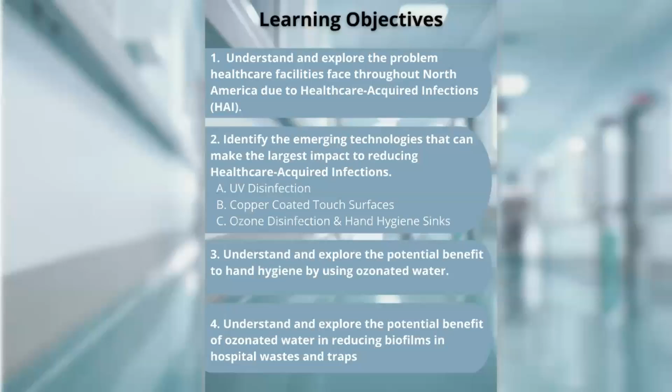And by the end of this presentation, you'll have a deeper understanding of the benefits of ozonated water related to hand hygiene. And lastly, we'll discuss how ozonated water technologies benefit hospital cleanliness and improve patient outcomes. So first, we'll cover the basics. What is a healthcare acquired infection? We call them HAIs. HAI is short for healthcare acquired infection or hospital acquired infection. We'll use those interchangeably. An HAI, put simply, is an infection that you get from a hospital.

There's 4 criteria to labeling an HAI, and it can meet one or all of these criteria. 1, it's acquired up to 48 hours after admission to a hospital. It's acquired 3 days after discharge from a hospital. It's acquired up to 30 days after an operation, and or it's acquired in a hospital when admitted for something other than the issue or problem that you went in with.

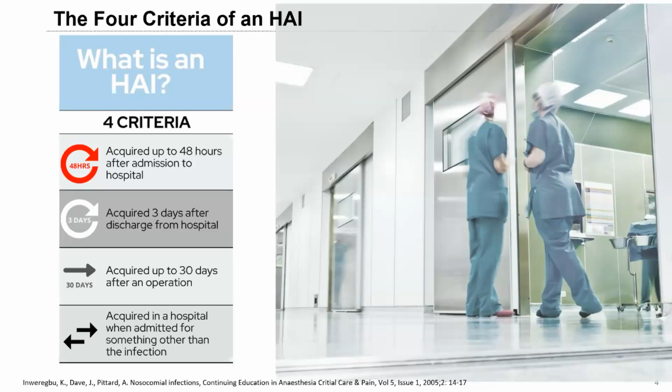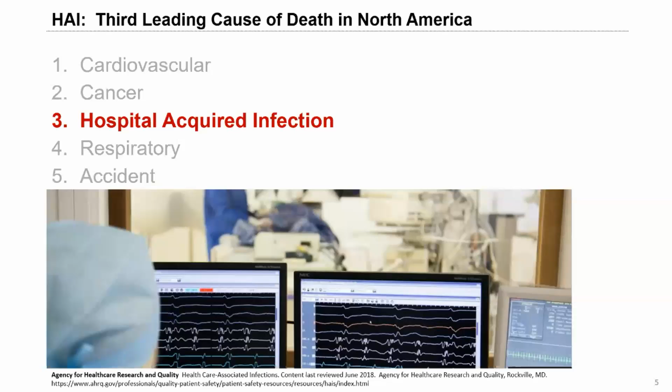So as I go through this, I'm going to be talking about stats and information that was found and researched before the pandemic. So all of these facts and figures are pre-COVID. Even though COVID has likely impacted these figures, the team felt that it was important to not just kind of take a guess. COVID has impacted these numbers, but we felt that this information was good to present on its own. HAIs are among the leading causes of death in North America. When we look at Canada and US per capita, HAIs are estimated to be the third leading cause of death.

And these stats are pretty alarming. Every 45 seconds, a hospital patient is infected with an HAI, and every 8 minutes, a patient dies from an HAI. So on any given day, 1 in 31 hospital patients have at least one healthcare acquired infection, and 1 in 10 of hospital infected patients will actually die from their HAI. There's a huge economic impact as well.

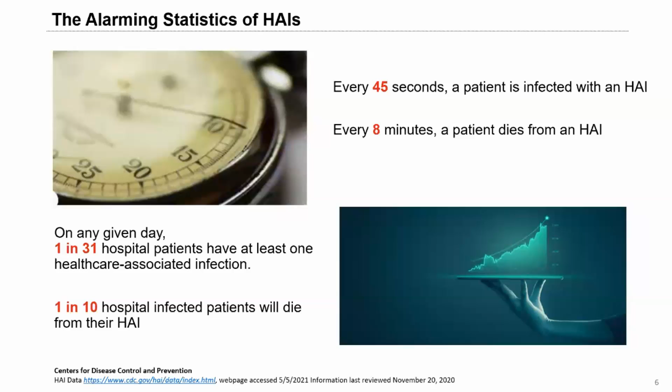HAIs are expensive. The estimated average direct cost for HAI treatment is about $30,000 per case. And according to a University Health Network study, C. difficile cases cost over $38,000 to treat. The direct treatment cost for hospital-acquired infections is estimated at around $45 billion annually. And that's pre-COVID information, like I said. I'm sure COVID's made it worse.

The total cost to the healthcare systems, to families, to the economy, and to individuals is even higher. HAIs have a domino effect on the whole healthcare system. Infected patients stay in hospitals much longer before being discharged, and approximately 10% of acute care beds in urban hospitals are occupied by patients who have had an increased length of stay due to their HAI.

And so when patients are in the hospital longer, they take up valuable bed spaces. Patients end up being treated in hallways and lounges or squeezed into rooms designed for fewer patients. We've seen the overcrowding. ER wait times are also increased because the ER is stacked with patients waiting for a bed to free up.

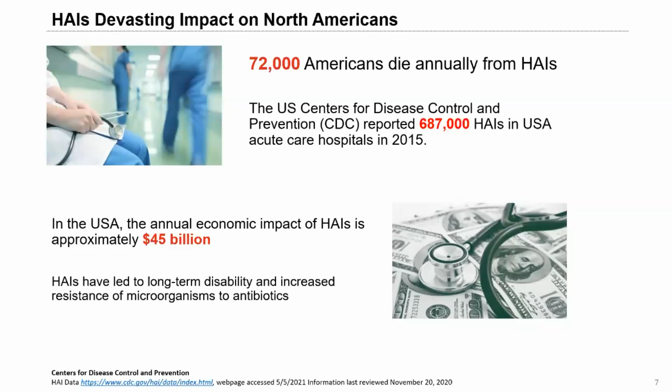So the 3 most common forms of HAIs are C. diff, MRSA, and CAUTI. Clostridium difficile is one of the most frequent infections to occur in hospitals. C. diff exists in a vegetative state inside the human body, and when it's outside the body, it can exist as a spore, which can become airborne and spread to surfaces. Alcohol-based sanitizers cannot kill C. diff spores.

MRSA is a form of staph infection that is resistant to many of the common antibiotics used to treat staph infections. So due to their resistance, they can easily spread throughout the hospital, causing alarming outbreaks. And catheter-associated urinary tract infections can occur when patients are catheterized for a longer period of time, or if there's improper maintenance or procedures used to change or put in or remove their catheters.

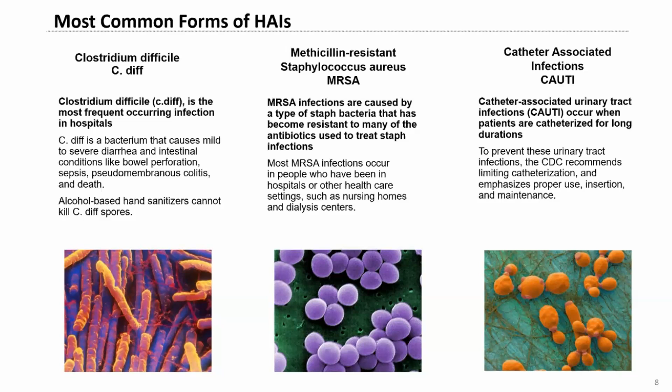So containing the spread of HAIs is really important. Next, we'll look at techniques that hospitals and healthcare facilities use to help prevent the spread. This presentation was initially created before the COVID-19 pandemic hit. Hospitals have likely improved their room cleaning protocols since the start of the pandemic. So when it comes to cleaning, patient rooms are first decluttered and then cleaned and disinfected to be set up for the next patient. The process is traditionally done with cloths and harsh chemicals at the very minimum.

So a manual daily cleaning takes about 15 minutes to do. Surfaces are spot cleaned since patients are still usually occupying that room. A room turnover or terminal clean is performed after a patient has left the hospital prior to a new patient coming in. A room turnover clean takes about 30 minutes. And an isolation clean is the deep cleaning performed after a patient who's been in isolation or who's had an infection has left that room. That's an even longer process. It takes up to about 45 minutes.

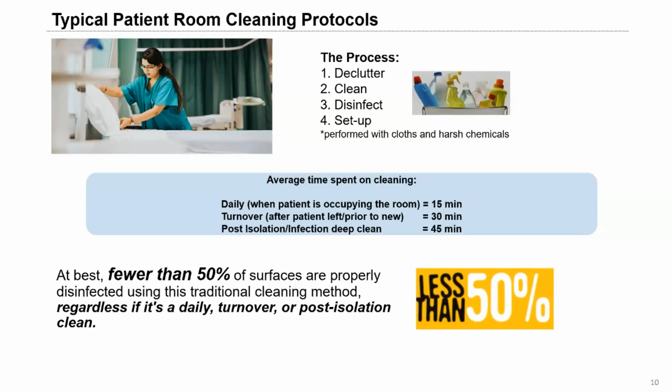At best, fewer than 50% of the surfaces are properly disinfected using this traditional cleaning method, no matter if it's a daily, a turnover, or a post-isolation clean. Proper cleaning practices are important to help control the spread of infection in hospitals. And next, we'll be exploring the technologies that can help prevent healthcare-acquired infections that go above and beyond just that straight chemical and cloth cleaning. These are emerging technologies, not because they're new, but because their use in the healthcare setting is becoming more and more prevalent.

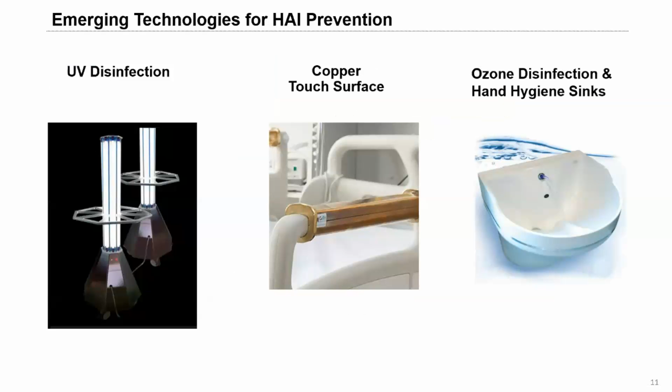So, oh, that's a blurry photo.

So fast forward to modern times, studies have shown that UV disinfection has a dramatic impact in reducing healthcare-acquired infections. UV light will disinfect all surfaces, and it's extremely effective when used in conjunction with traditional cleaning. Rooms disinfected with UV have shown reductions of HAIs by over half.

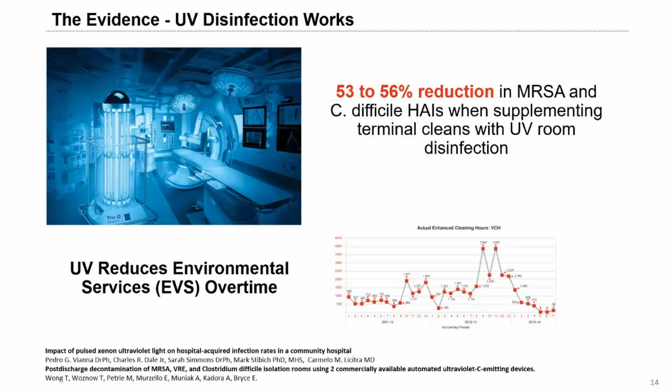So they brought in the UVC machine, and after UV disinfection, 0 out of 21 rooms tested positive for C. diff. So we show that UVC disinfection is an effective neutralizer of that persistent bacteria.

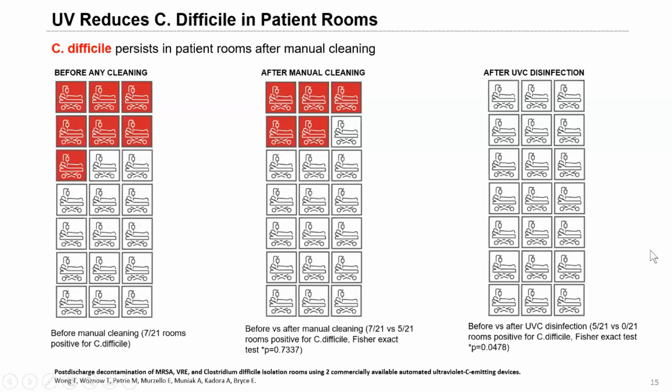So next we'll review how copper can be used in healthcare applications. Like UV disinfection, copper has been known to be antimicrobial for a super long time. The Egyptians were the first to mention the antimicrobial effects of copper in about 2600 BC. They used copper vessels to sanitize drinking water. They used copper implements to treat chest wounds. Copper is registered with the EPA as a pesticide and can reduce colony-forming units by 99.9% in less than 2 hours.

Here's a couple of real-world examples to show the reduction of surface pathogens that occurred when hospitals changed some high-contact, high-touch surfaces to copper. So on the left, the Memorial Sloan Kettering Cancer Center in New York changed the bed rails, the food service tray, and the IV stands to copper-coated surfaces. And by doing so, it reduced the pathogens on those surfaces by 97%. So notice the high traffic touch surfaces are copper in the room on the right. HAIs were reduced by 58% in this VA medical center in South Carolina.

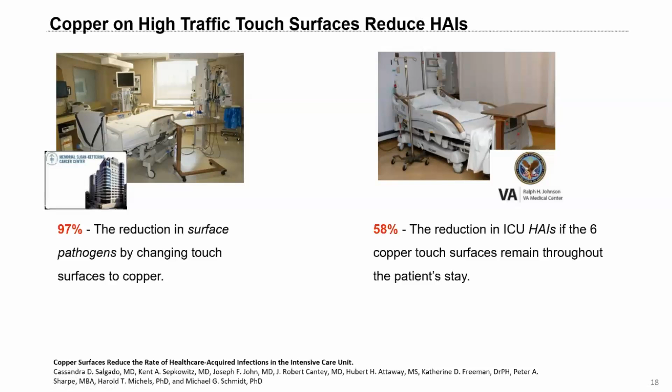I thought I'd throw in a real life non-healthcare example of a very high traffic area. This is Grand Central Station. Last time I checked, we had 750,000 people pass through Grand Central Station every single day. Grand Central opened in 1913, so some of the fixtures in that building can be over 100 years old.

On the right here, we show some high touch surfaces like this pull handle and this railing are made of copper. So swabs were taken on a few touch surfaces, and you can clearly see the difference in CFU counts between copper and other non-copper surfaces. So the wood right beside the handle has so many more colony forming units per 100 square centimeters. Same thing with the wood on this railing versus the copper railing beside. The difference is huge.

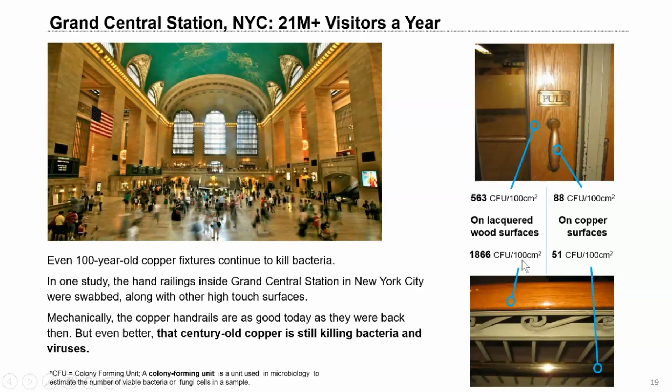So here are some examples of copper touch products available on the market today for healthcare. We're starting to see various antimicrobial copper medical equipment being put into practice. So from stethoscopes to doorknobs and food trays, this is a great use of this material for high touch surfaces. Copper is a great application for dry touch surfaces, but keep in mind they still need to be cleaned.

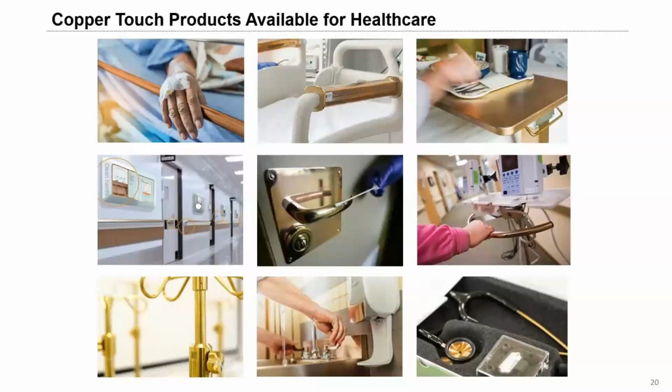The thing is it's great for plumbing as well. However, the bacteria needs to be wiped away, and there's no real mechanical way to wipe away inside of plumbing. If you leave bacteria in plumbing, it creates a layer over time called the biofilm that acts as a barrier against further effectiveness. So it's almost like a little crust that builds.

So moving on from UV and copper disinfection, let's review ozone technology for infection prevention. You might see a reoccurring theme here. These technologies aren't new. Ozone has been used for water treatment for centuries. So ozone is a powerful and unique disinfectant. We're talking about applications for water in this presentation. Ozone is germicidal and rapidly destroys any waterborne viruses and bacteria with nearly unmatched speed.

So like chlorine, ozone oxidizes the bacteria and protozoa upon contact. The ozone penetrates the cell wall of the microorganism and ruptures them on a structural level, and the microorganisms can't reproduce. So unlike UV disinfection, there is no reduced flow rate or extended contact time required for disinfection. Ozone works in a matter of minutes. Ozonated water is non-toxic to humans at the levels required for disinfection. And the ozone produced in the water stream reverts back to O2, simple oxygen, within about 20 minutes.

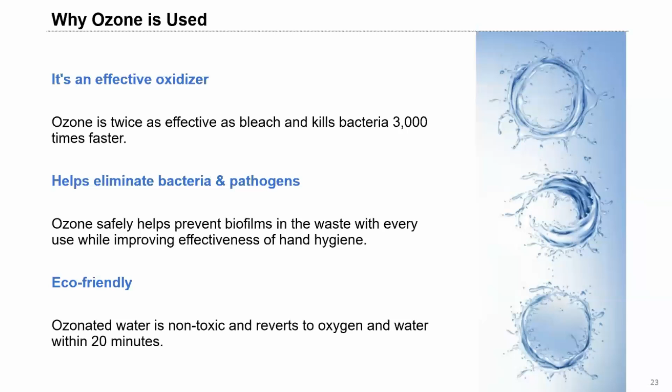So ozonated water has been shown to be effective against many forms of bacteria, such as Legionella, E. coli, C. diff, and more.

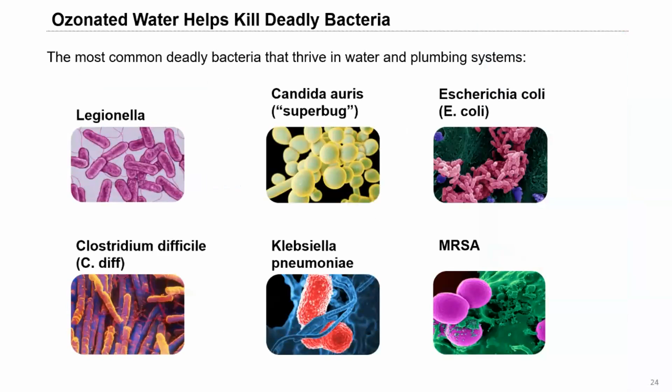So these are the most common bacteria that thrive in plumbing systems. So just so you know, we're not talking out of school. We've got the data to prove the effectiveness. Time kill studies performed by third-party labs show that electrochemical water disinfection using ozone and different oxidizers can be effective at reducing waterborne pathogens with super low contact times too, within seconds or minutes.

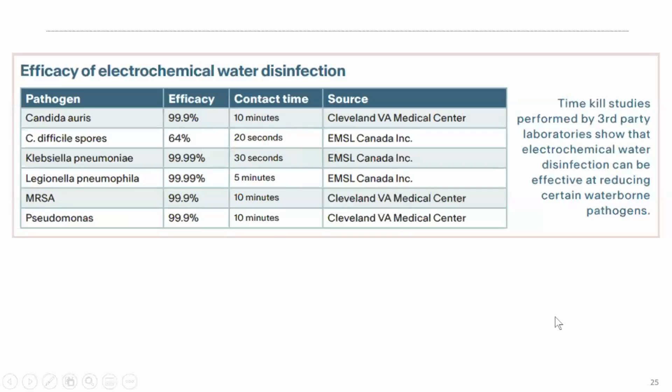All right, we're getting into the good stuff here. Ozone is also effective against mold and mildew forming organisms.

Again, if you're having lunch, I'm sorry. These next few slides aren't going to get any better.

So here's an in-field example of the problems caused by mold and mildew growth in a wet environment. This is the inside of a hospital ice machine. This photo was taken 3 months after a deep clean. So you can see the buildup of mold, mildew, and yeast. This is where your ice is getting made.

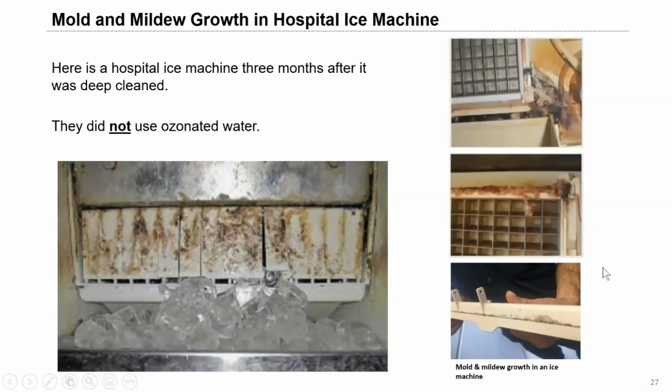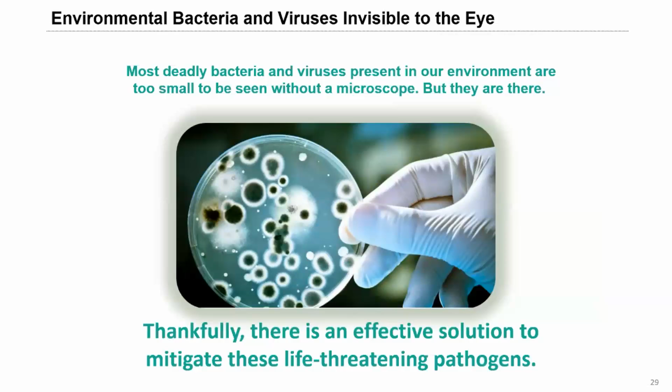So there are bacteria and viruses that are present in our environment. They're in our ice machines, they're in our plumbing, and in any number of bodies of water. And they don't tend to cause a lot of issues out in the wild. But the problem happens when people who are sick or immunocompromised are exposed to these pathogens. It becomes a problem. And we have a solution to help mitigate waterborne pathogens, and that's by using ozonated water for hand hygiene.

So it is now possible to wash your hands with water that has disinfecting properties. Infusing water with dissolved oxidants, including ozone, can help reduce the number of bacteria that's present on hands, making hand washing a lot more effective. Those same disinfecting properties will also help eliminate the sink as a source of bacterial outbreaks, which has happened, but we'll talk about that later.

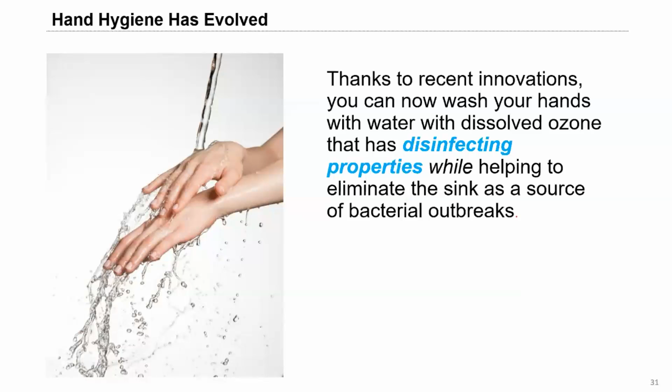So healthcare staff are well trained in the method and importance and technique of proper hand washing. But it's usually not healthcare staff that's the problem. Often it's the unclean hands of the patients themselves that cause the transmission of HAIs. A study conducted in patients of hospitals using RFID tags show that they'll wash their hands only about 70% of the time. So that's like before and after eating, before and after using the bathroom.

I'm really sorry if you're eating.

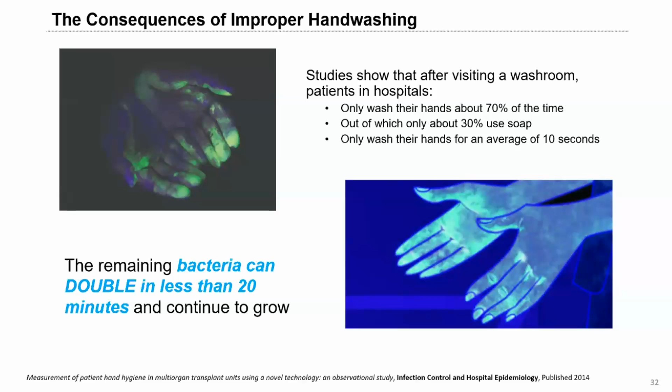Of those that were shown to wash their hands, only about 30% of them use soap and are only lathering for, on average, about 10 seconds. And if the pandemic taught us anything, it's you need to lather for 30 seconds. So when you have bacteria that's left on your hand, that bacteria will continue to grow and double in less than 20 minutes.

So a university study performed hand wash studies on untrained participants, just meaning regular people, not healthcare people. So for the large percentage of people that only use water to wash their hands, the improvement in hand washing is evident. So we had 4 groups of people that washed just with tap water, with soap and tap water, soap and ozonated water, and ozonated water only. So using soap and water showed a removal of just over 61% of the bacteria. By using the same methods with ozonated water, over 80% of the bacteria was removed.

Now, you look at this chart and we're not recommending to not use soap. It's just that this study shows that behaviorally, if a patient is using ozonated water and chooses not to use soap, the benefits will still be there.

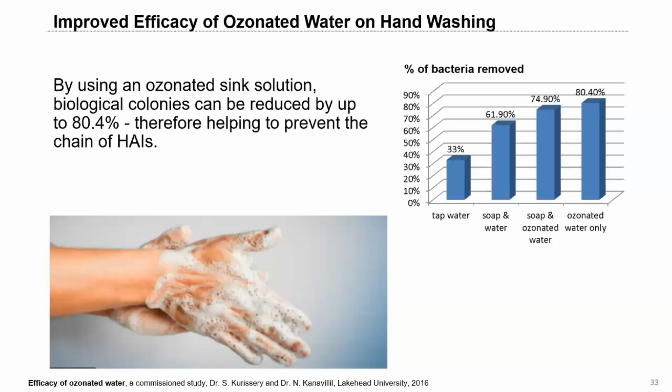Sorry, so we talked about biofilm. Okay. Just a quick question before we move on to some of these next parts. We had a couple of questions coming in, kind of comparing the hand washing for ozonated water versus the cleaning that you mentioned. Are they different systems for generation? No, it's the same system. But would you have a central ozonated water generation, or would you have more point of use for each piece of equipment? Yeah, so each sink has an ozone generator built in.

It's shipped with the product, and it generates ozone on demand, because ozone reverts back to its oxygen state. So the ozone molecules that are in there are not super duper concentrated. They're concentrated enough to make a difference on the spot, but you can't have a tank of it going out to the entire floor or through the whole hospital. So it's just sort of a small contained unit.

And then for the ice machine cleaning that you had talked about, would that be a separate sink system, like an ozonated generation in the maintenance area, or how? Yeah, so it's actually a small inline unit for that ice machine. So that's actually a really small unit for the ice machine that generates ozone just to be able to run that line to the ice machine.

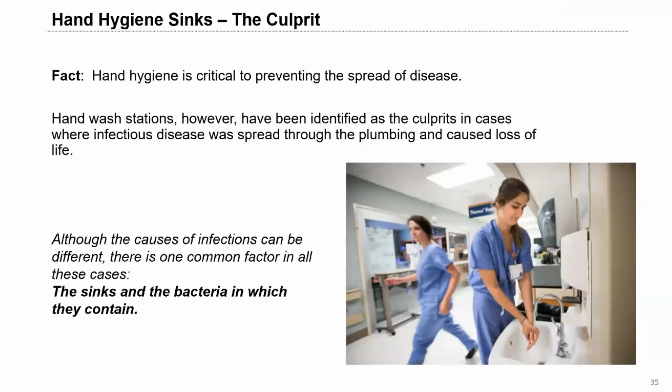It's been known for hundreds of years how important hand hygiene is to prevent the spread of bacteria and disease. Thank you, Florence Nightingale. Look her up. Hospitals are designed with hand hygiene sinks placed throughout the hospital to help control outbreaks. Unfortunately, in some cases, some hand hygiene sinks have actually contributed to the HAI problem. So poorly designed hand hygiene sinks have been shown to harbor and spread bacteria.

So between 2004 and March 2006, a prominent hospital in Toronto experienced a deadly contagious Pseudomonas outbreak that led to the death of 17 patients, and 36 other patients developed serious illness while under the hospital's care. Another prominent hospital experienced 66 patients infected or colonized by a very pesky drug-resistant bacteria called Klebsiella oxytoca from the fall of 2006 to the spring of 2011.

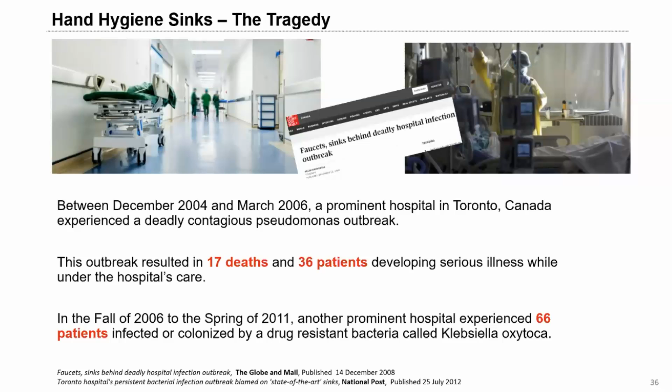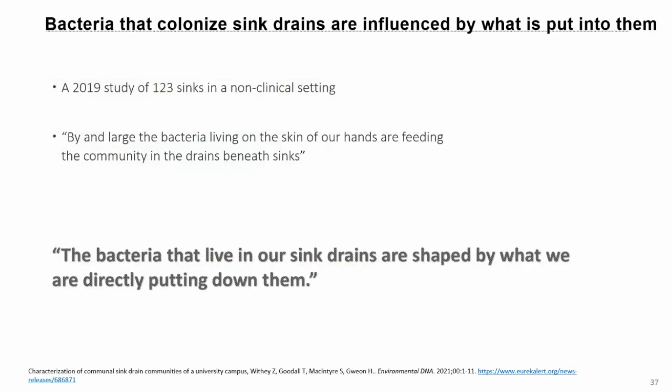So these were highly publicized instances where an outbreak was traced back specifically to a sink. The problem was twofold. It was the design of the sink as well as the bacteria inside of the sink that was making people sick. So the bacteria that lives in a sink drain is shaped by what we're putting down them. That's a quote from Zoe Withey, a researcher at the University of Reading. She published a study of sink drains on a university campus, but the principle applies even more so to hospital drains because they put everything down that drain, sometimes when they shouldn't.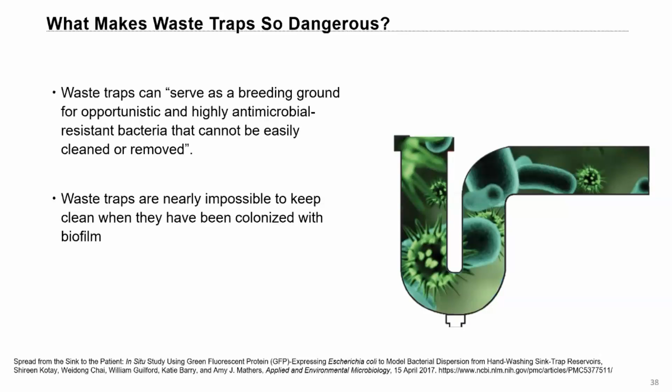So what makes waste traps, especially hospital waste traps, super dangerous? Waste traps are a perfect breeding ground for bacteria. It's dark, it's wet, and they're constantly being fed a nutrient-rich diet of germs, bacteria, bodily fluids, IV bags, basically all the stuff you want to wash off your hands. Waste traps are nearly impossible to keep clean, and antimicrobial resistant bacteria continue to grow day in, day out.

So this is some research done by the University of Virginia in 2017, proving that bacteria can flourish and grow in the P-traps of hospital sinks. Bacteria can also climb up from the P-trap to reach the drain area. And then all it takes is a splash of water to make that airborne. The bacteria can get splashed with water and then grow wherever they land.

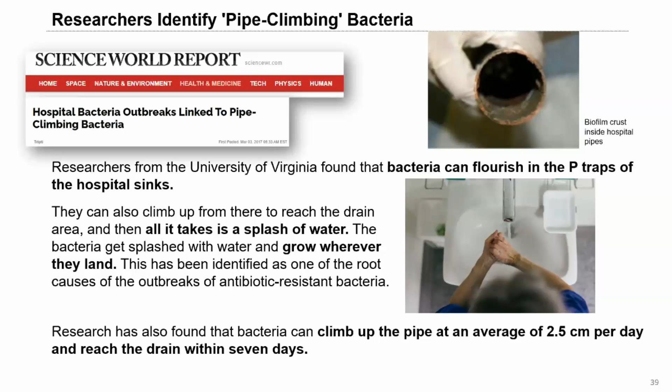So the P-traps have been identified as one of the root causes of outbreaks of antibiotic-resistant bacteria. And this research has also found that bacteria can climb aggressively up the pipe at an average of 2.5 centimeters or an inch a day, and then reach the drain within 7 days. And it'll also climb through the plumbing system throughout the hospital and continue to grow outwards. So it's important to be able to contain the bacteria that's in the P-trap.

So yes, my GIF is running, awesome.

Once the bacteria reaches the drain, all it takes is a poorly designed sink to enable this bacteria to be splashed up to 3 feet or 1 meter away onto users, onto patients, and onto nearby surfaces. And this GIF illustrates the problem perfectly. When a faucet is installed on a sink and it shoots directly down into the drain, the water will splash upwards from that area where all that biofilm is growing.

So this is just a video that we took with an iPhone, and it's showing you what happens when a faucet is mounted directly above a drain. You can see that the water is shooting down into the drain, and then you see water droplets flying everywhere. And these are just some that you can see. The water that's hitting the drain can propel bacteria from inside back onto the person washing their hands and onto surrounding surfaces.

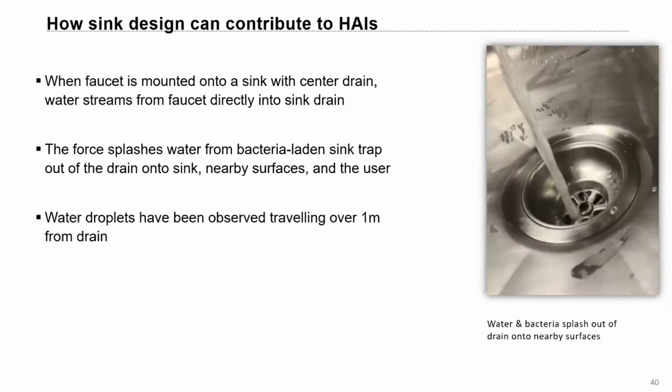And I mean, when you think about the reason that person is washing their hands, to be able to treat a patient, or a patient is going to go and eat, the last thing they're expecting is to have gross biofilm splashing back onto their hands. And that can be what happens if you have a drain that is directly under the faucet.

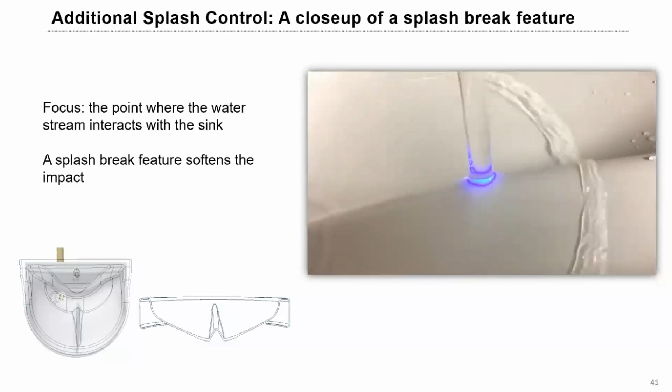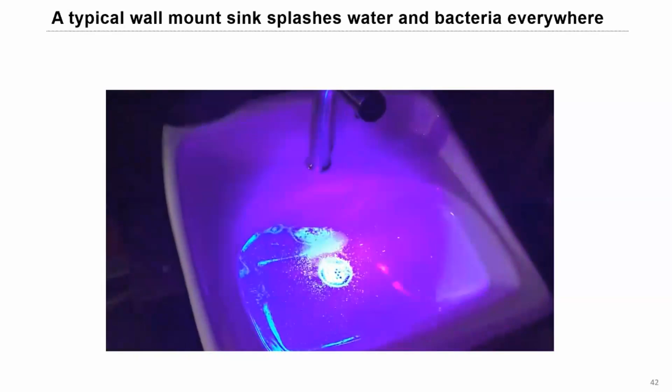So this is a demonstration of the design in practice. So these videos show how typical healthcare sinks with flat bottom surfaces and poorly placed drains can splash water and bacteria everywhere. So first, we added luminescent powder all around the waste, and we turned the light on and we washed our hands. We turned the light back off and we got our UV light out.

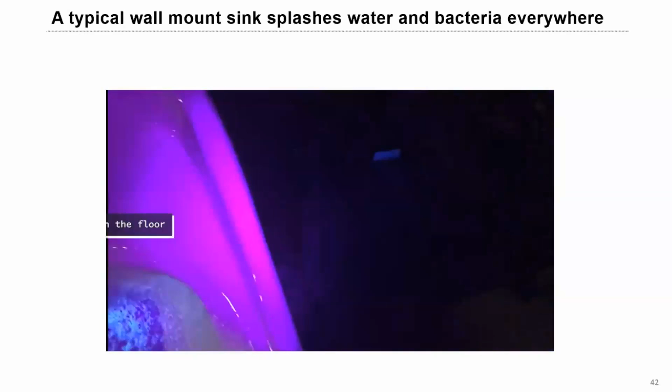And now you can see the flecks of the material that have been splashed everywhere. They're on the floor, they're all over the sink, they're on the back wall, they were on the person that washed their hands as well. The splashing, even though you might not feel it, it's definitely happening. So yeah, that was just a before and after of hand washing in just your typical regular sink.

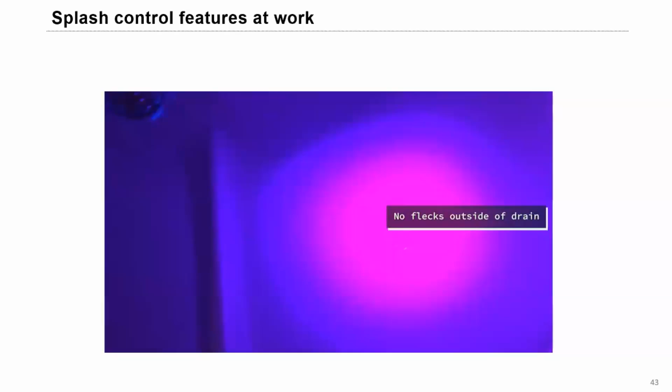That luminescent powder is contained just to the drain. It's not on the walls, it's not on the user, it's not on the floor, it's not all over the sink. It's all contained because you don't have the water splashing directly onto it and then sending all those water droplets flying everywhere.

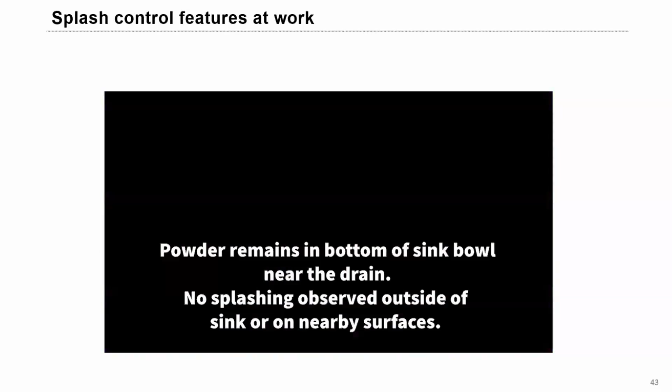So, I mean, there's only so much you can do to optimize a sink and faucet design for healthcare. You have to take into consideration human behavior. You've got to take into account how a user can wash their hands in the most optimal way. And you can design a fixture to force the user to have their hands in the absolute best position for hand washing to help control splashing behavior. So this study here shows the difference between a sink with splash control features on the left and just a standard sink on the right.

So the goal of this experiment was to show how much splashing actually happens in a real world scenario. So we set up the sinks and we put up white absorbent paper on plexiglass shields to the left and to the right of sinks. And the participants were dressed in painter coveralls and a mask.

Their hands were covered in a washable purple tempera paint, and they were instructed to wash their hands to completion, like to get all the stuff off their hands. The sinks weren't cleaned in between participants to simulate a real life setting.

So as you can see, on the right, there's purple paint all over the rim of the sink, all over here. There's been a lot of splashing action happening on the sidewall as well, and then you can see all the splashing that happened on the floor. But on the left here, you can see where patients had paint on their hands, just minimal splashing on the inside of the bowl, and very minimal splashing on the paper that was applied.

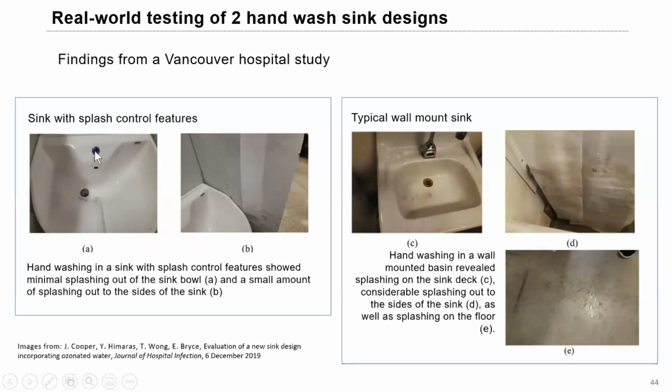So earlier we learned about hand hygiene with electrolyzed or ozonated water. In addition to the benefits of hand washing, the actual larger benefit of using this treated water is to help keep the sink waste free of bacteria and biofilm. Hospitals will often use harsh chemicals or labor-intensive cleaning protocols like steam to help control biofilms, but these methods aren't always super effective. The use of oxidized water with ozone helps prevent biofilm from forming and spreading.

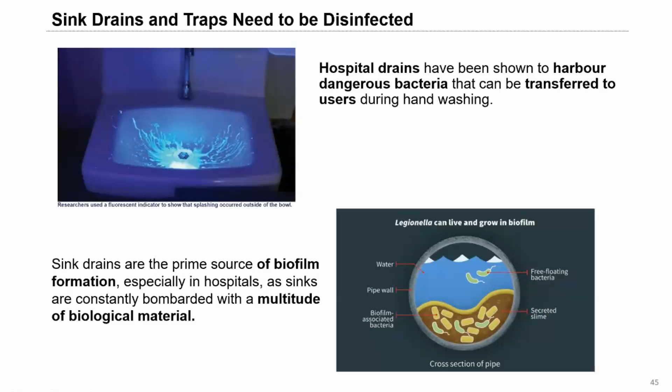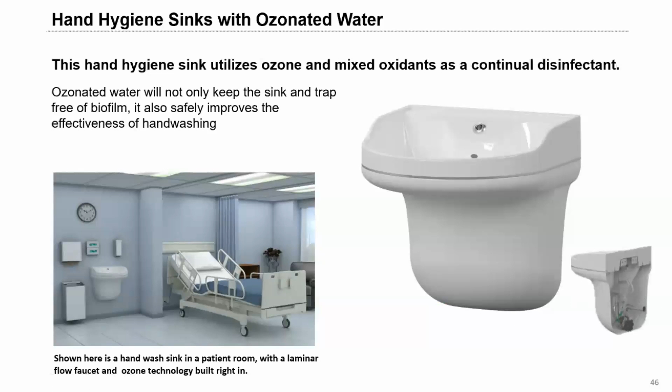And there's just a look at the sink itself from the front, and this picture here just shows the unit with the ozonation container in the canister in the back. So here's just to show how the technology works. Depending on screen size, it looks pretty big, but it's about the size of your forearm.

If you remember back into high school chemistry, you probably learned that water is comprised of 2 parts hydrogen and 1 part oxygen. So what's shown here is what happens when you oscillate a low-powered DC current through specialized electrodes. You can actually separate the hydrogen and the oxygen from the water itself. The free hydrogen and oxygen molecules react with the water chemistry, and in doing so, you create trace amounts of mixed oxidants from the water supply itself.

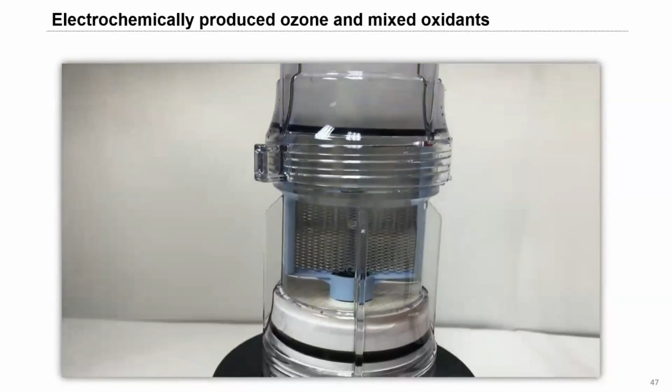So these mixed oxidants, many of which are reactive oxygen species, include ozone, hydrogen peroxide, and depending on the levels of chlorine content added by the municipality, you get hypochlorite. Again, no chemicals are added to the water. It's simply being reorganized to become hostile to pathogens.

So to close out this section on hand washing with ozone and mixed oxidants, I'll address the most frequently asked questions. Yes, the water is safe to drink. For infection control reasons, hand wash basins aren't usually used as a source of drinking water. Secondly, the water is mixed to a nice warm temperature, and it's not super awesome to drink warm water. I'm not into it. The process does change the water chemistry, but it's well within levels allowed for potable water systems.

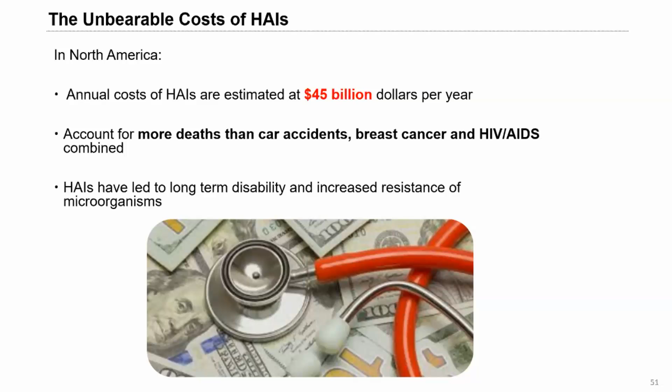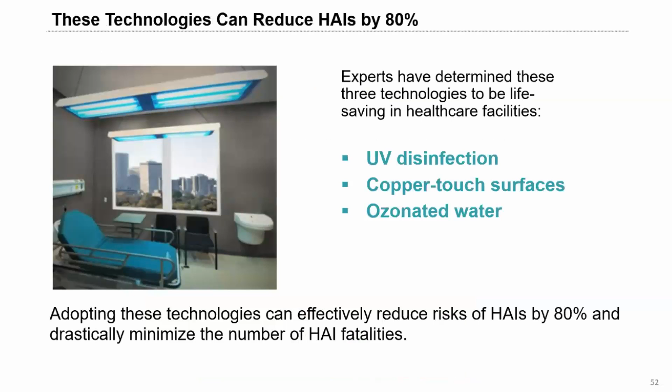As we've shown, traditional cleaning methods are notoriously inefficient for decontamination in a healthcare environment, but experts feel that the adoption of these technologies, as we discussed, UV disinfection, copper touch surfaces, and ozonated water, can effectively reduce the risk of an HAI by 80%, drastically minimizing the number of HAI fatalities. So it's frequently stated that in healthcare, it takes 17 years from innovation to implementation. There's hospital overcrowding, the ongoing HAI crisis. The time for action is now. And that's what I've got.

Perfect. I appreciate being able to discuss things throughout the presentation. Yeah, it's funny. Everyone always has that Q&A slide at the end, but I'm a big fan of getting the question and addressing it as soon as we can, because it's often better to bring it up at the point and really cover the topic that way. So we'll keep an eye on any additional questions coming in. That was fantastic, though. Angela, you did a great job.

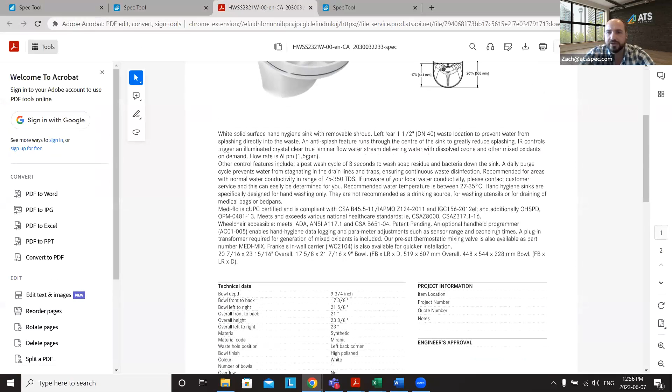For instance, I think it does say that there's a power supply that comes with the product somewhere in the spec. A plug-in transformer, generation of mixed oxidants is included. So our power supply is included. We don't need to go through selecting any additional power supply for this product. And then if there's any options, we can configure these as well.

So the MediMix is recommended so that we have the preset temperature exactly as the manufacturer designed. You can get a handheld programmer, and then you can install it with or without the shroud. And then we can add this. Only with the shroud. Well, they could always install it without it, but it doesn't look great.

For it to be wheelchair accessible, you need to install it with the shroud, exactly. And it looks awesome with the shroud, I promise. It looks nice. It comes with, but you can get one that's a replacement. Yeah. If someone ever smashes it.

And then we can select our traps. And for this, we would be wanting the 1 1/4 by 1.5 inch line size. You can get it with the standard guard or without. Of course, though, we can skip anything that we don't want to select. So if we have a trap already, if we have other standards that we're using, we can just select the items that we would recommend,

which is our carrier and the Medi-Flo. And there's a specific carrier to go with the Medi-Flo. So we've matched it up to make sure that you get the right carrier for the right product. That's part of that rule engine that I mentioned earlier. So now I'll hit complete and we can take it in.

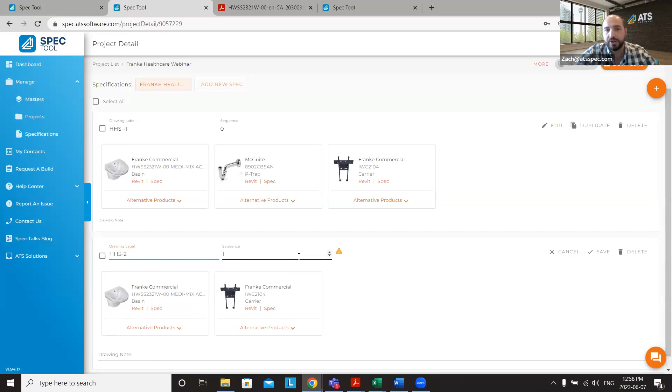And you can see I've already labeled this one as HHS1. And I could go in and edit this and call this HHS2 or option 2, whatever you want to call it. You can change the sequencing around. And I will actually hit delete because we've already got the 1 in there.

And just for ease of time, I will quickly show that we have a variety of download formats as well. We've got our PDF submittal, product brochures, schedules, various written specs, the manufacturer spec package, all the Revit files, all sorts of download options. So really it's about create your project, add your selections, and it's one of the only places in the industry that you'll be able to download multiple formats specific to the product you've selected.

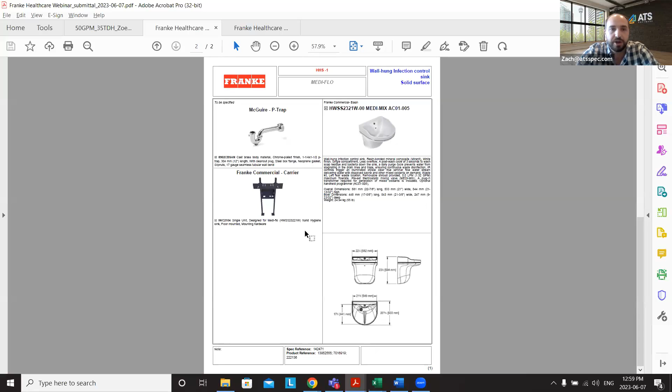This is not the generic manufacturer's cut sheet. This is a customized version to the selections that you've made. It comes with a nice title page that you can get your company's logo on the front, and then shows the products with the important details to get your specification. You can see this is a configured model number, not the base model number.

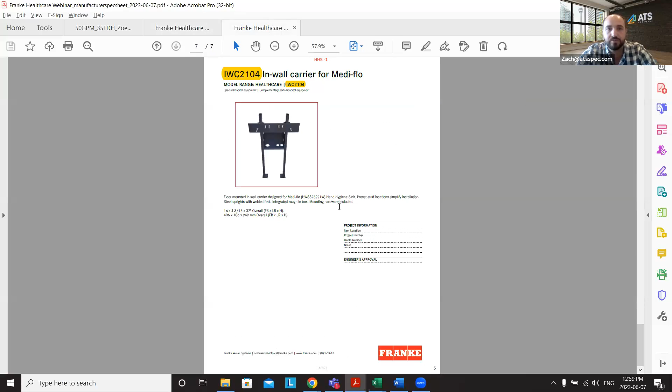Now we can also give you the manufacturer spec sheet package, like I mentioned. You can get all the various manufacturer spec sheets that you might need based on your selection. I wanted to show the schedule in Excel that's available as well.

And these are customizable. So if you have drainage in here, if you have backflow, your pumps, your water heaters, your accessories from Bobrick, then you would have different schedules similar to how you would have different schedules on your drawings. It separates them. It has specific column headers that match typical formatting.

And then finally, one of the 3 versions of written specs that we provide, where you can just simply copy, paste this into your internal written format. Maybe the short format works better for you. Maybe our CSI 3-part format works better for you. Whichever one matches how your firm goes out with your written spec. Nice and easy to copy and paste in whatever it is you need to do. And you get the updated, accurate model number.

And of course, if this goes out of date, even after you've downloaded, say they change it from the HWSS to an HWPP, I don't know, some other number, you would get a notification from our system telling you, hey, this model number's changed and updated on your current project. We recommend re-downloading, reselecting, or if it's a big change like a discontinuance, then one of my team will reach out to help you re-engage with your project.

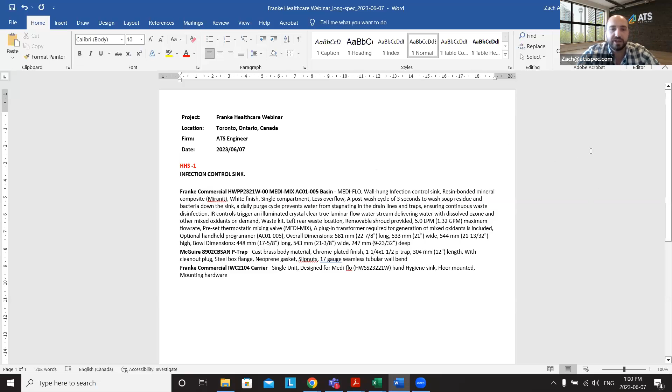That's awesome. Final thing that I want to show, this is just for a single selection, but we launched a new feature recently called our ATS templates.

Now you can have your internal master as well. So if you have the same selection for all your hospitals, or different owner groups where one prefers manual faucets and the other prefers sensor-operated faucets, you could have customized templates for those owner groups called your masters.

Our ATS templates are our recommended good, better, best based on the application. So if I search up healthcare, and these are available for everyone, we have a US healthcare standard and a Canadian healthcare standard because there are different codes for those different areas. So our healthcare template for Canada is going to meet our CSA 317 all the way through.

You could go in, hit select all, and copy all of it over into your current project or into your own master that you could then edit. Or we can just copy specific features. So let's say we need an electronic flush valve. We need a barrier-free version of that flush valve. Wait, that was the wrong one. That was our better. We're going to go with the best.

And then we need a manual faucet. So the GN2FC, that's the laminar flow at the inlet that we talked about. And then we can select any electronic faucet as well. And I'll show you how you can edit this super fast as well. So we take our standard recommendations and then we hit copy to, to the project, to a master, or we can hit new.

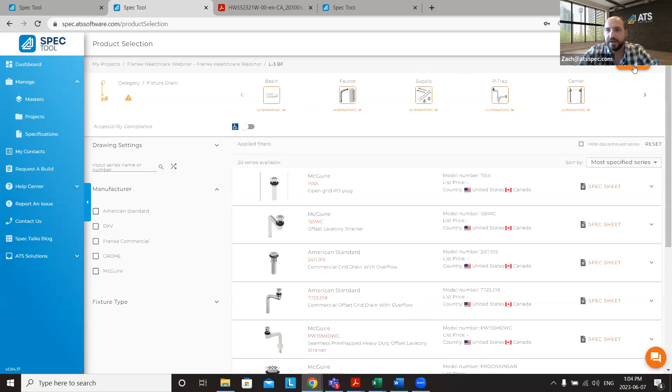Now, we already know this comes with our power supply as well. So I'm going to delete the transformer because we don't need that anymore. And I can delete the mixing valve as well. And then hit complete. And now I've got just the components I need. And again, you can download this in any one of those formats we talked about before. So if you're looking for the Revit files, the cut sheets, the written specs, anything within the system will be able to help you out.

And of course, again, everything's super easy to edit, revise the title, and call it whatever you need to within your firm. If you ever want a personalized walkthrough on the system in more detail, feel free to reach out to me or my team. We'll be happy to provide presentations for your firm or one-on-one presentations to help you figure out the ins and outs of the system.